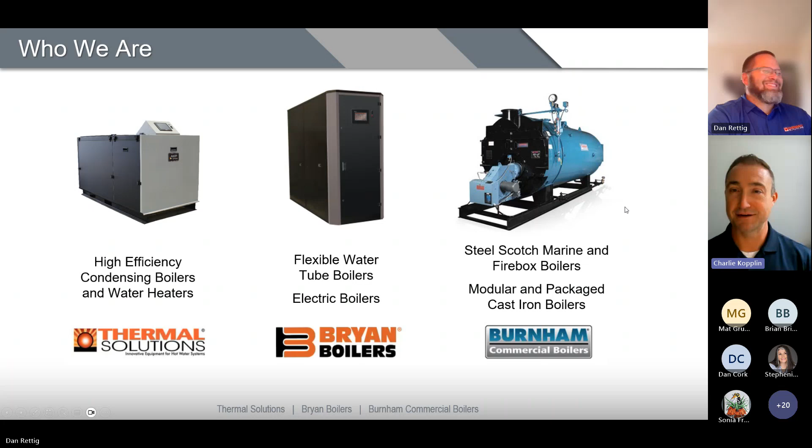Yeah, thank you, Charlie. I'd like to apologize to everybody before we get started. I traveled last week and brought a cold or a virus home with me. I was out getting voice of customer and brought more home than I wanted to. So I'm working to get over that, but I think we can get through the next hour together.

As Charlie said, this is the third webinar we've done in the series, so this one will be a little shorter than the previous two - we were right up to the hour on those. Today we'll be talking about hydronic piping, some questions that come around common manifold sizing, why manufacturers have the recommended sizes they do, some common problems with variable speed pumps and flow rates. We'll talk about that and different piping configurations.

Then we'll get into what's been a pretty hot topic in the industry for the last several years: water quality. As more and more high efficiency boilers have got accepted into the market and installed, what's popped its head out is that these units have small passageways and are more sensitive to poor water quality. So we need to make sure we're aware of what that water quality is in the systems we're putting it in, so we'll talk about that.

I've got a reference manual on the screen - I think this is a big takeaway. If you go back 10 years ago, if you looked into any boiler manufacturer's manual, there'd be minimal reference to water quality. Now you can pick up 10 manuals and you're going to see some kind of reference to water quality, different types of filtration, air separation. So the industry is going in the correct direction to provide good guidance for specifying engineers and installers.

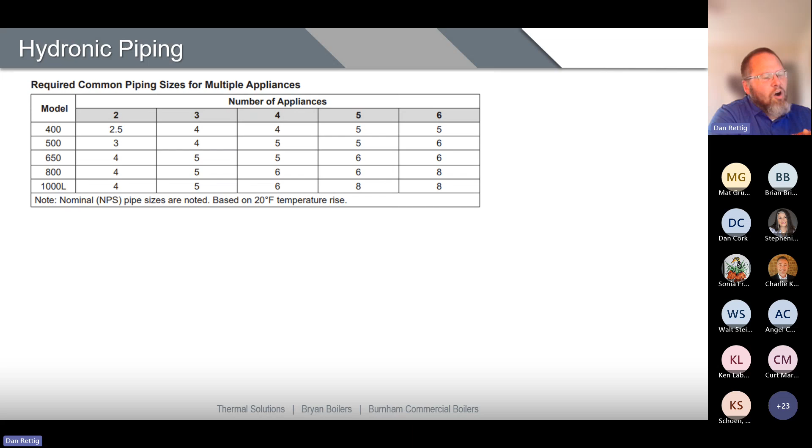But that is a pretty common conversation that'll be had on this common manifold piping. Why is it so large at times? And that is always going to be towards the maximum flow. And then also in this chart, you're going to see, just your basic, the one at the bottom right is going to be your recommended range for delta T's. You're going to have this provided by every boiler manufacturer, and that's going to allow you to properly size a pump.

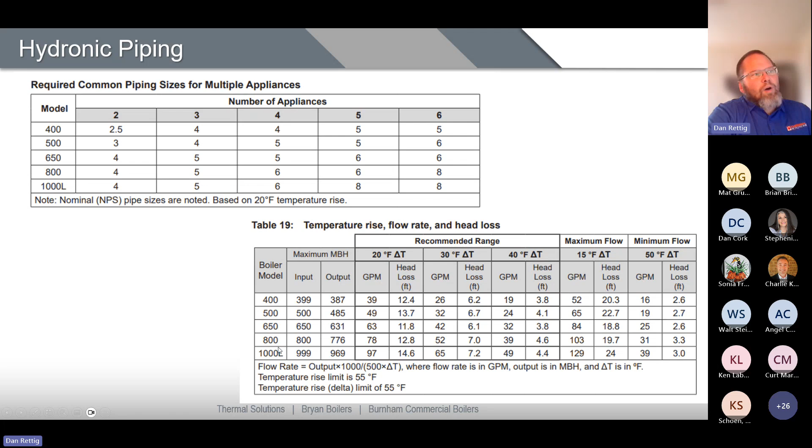A lot of manufacturers for boilers will offer some kind of pump. If you have a specific brand you want to use, you may not be able to source that brand from that manufacturer. You can always go through your local pump rep to get that specific brand, but most manufacturers will provide some kind of pump in their catalog, and they'll usually have a recommendation on what pump to use with what model.

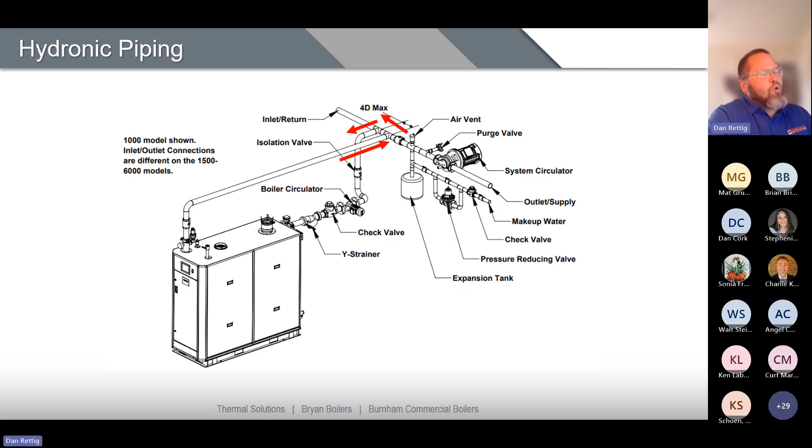What you'll do is you'll have to know the GPM range out in the system and the GPM of the boiler. But that is, if you're not willing to adjust the system circulator speed and you have this issue going on, you're going to have to put some kind of buffer of volume in between those. Or, you just turn down the system pump, or turn up the system pump so it's always flowing more than the boiler loop, pulling those BTUs away.

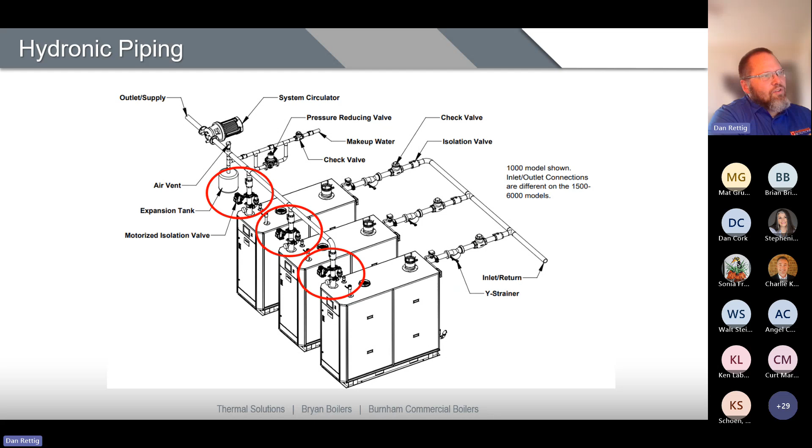Even if somebody's controlling the logic on a regular basis and doesn't have any issues, that doesn't mean that some kind of bug can pop up and one of these isolation valves may close on accident. So it's really just a dynamic of what happens in this situation in this piping arrangement, but this is something that I've seen over the years happen quite a bit.

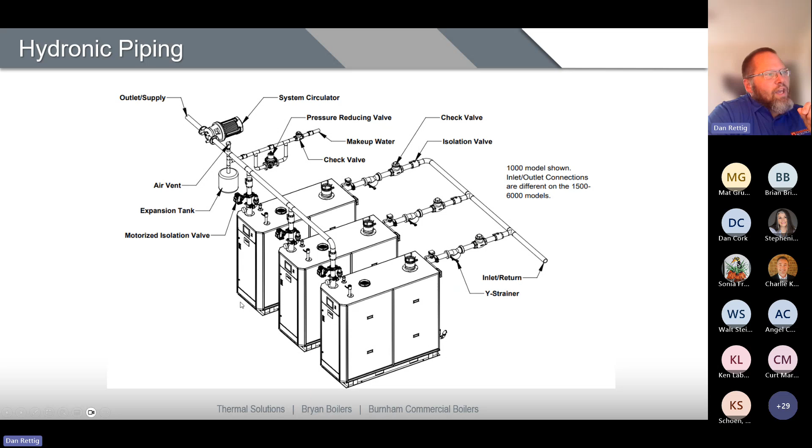Most systems, as you know, are going to have a minimum flow rate, so this can be just set at that minimum flow rate, and you can maintain that system flow if you want to isolate the boilers when they're not operating. In that previous scenario, a lot of people like to isolate the boiler because they don't want flow going through a non-firing boiler. But again, we just need to be aware if there's nowhere for the water to go, it's going to find somewhere to go, right? It's going to exit the system.

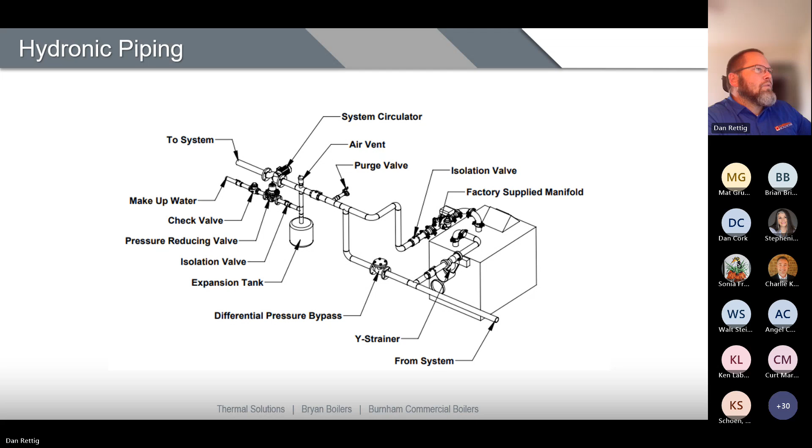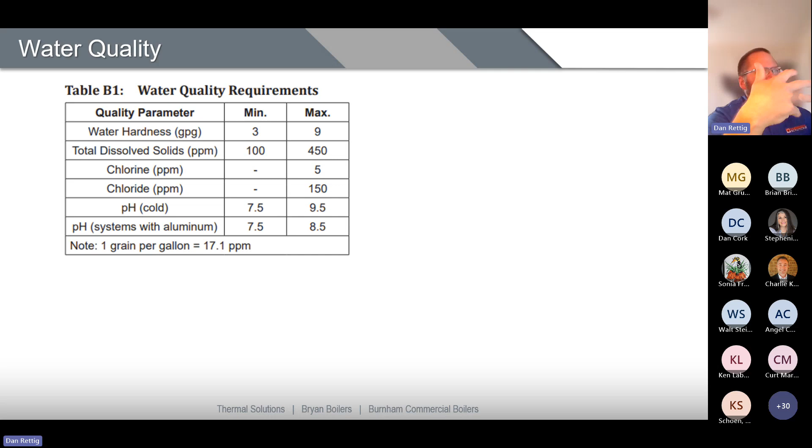So now we'll get into water quality. As I said at the beginning of the presentation, we have taken major steps in the industry towards water quality. I remember the conversations 10 years ago, it was like, well, what is the recommendations of the manufacturers? A lot of us were just kind of standoffish, we'd say go talk to the water quality experts. But we all realized we can no longer hold that line. So what you started to see is everybody was getting parameters put in their manuals, giving different recommendations. I would say we're still not all giving the same recommendations, but we do have recommendations. So again, we're in a lot better place than we were 10 years ago as an industry.

So right here, you'll see our water quality requirements as far as water hardness, total dissolved solids, chlorine, and pH. So referencing the total dissolved solids earlier, that's just all the nasty stuff that's in the water. You can see our maximum is 450 ppm.

So what I was talking about earlier with excessive flow, velocity and piping - if you aren't monitoring your TDS, that's what you can start to see is pitting in the 90s or anywhere the water hits the pipe and has to move. Even possibly in a T, you may see some pitting. But again, that's not unusual.

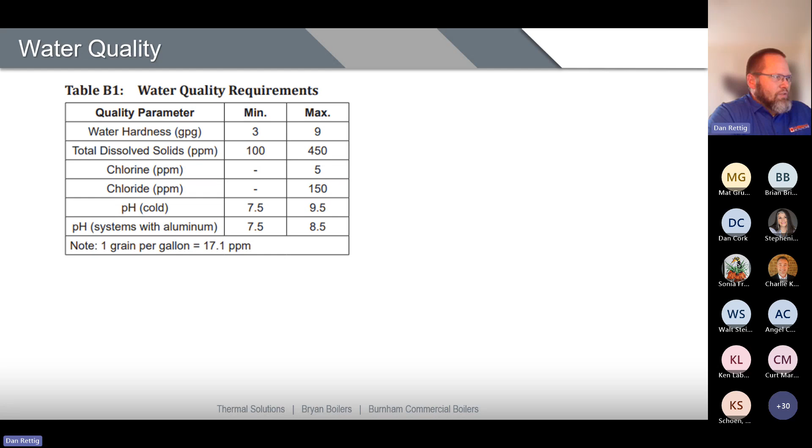But now with these guidelines, I think a lot more people are paying attention to their water quality, so we do give good recommendations. Now this is also something interesting - you're going to start to see reference to water meters. There's recommendations that say put a water meter in your system, that way if it's leaking, you can actually verify.

Through the years, I've been on many job sites. You go there and they're like, oh, my system's not leaking, or it's a small leak. So if the system is leaking, what happens is you're introducing fresh water into it. That fresh water, if it's not being treated, that system becomes more like an open loop water heater, domestic water heating system, than a closed loop hydronic system.

So to give an example, one job site didn't have a water meter. We were pretty sure the system was leaking. So we actually turned the incoming water off, came back the next day, and that system had been operating at 20 PSI. When we came back, the system was at 8. So it had lost a significant amount of water.

So then what we did is we got there to get it running, opened it back up, and the system filled itself back up. After that, they installed a water meter and did find out they had a pretty significant leak, and then they had to go locate the leaks. This was a system that had a lot of buried pipe under the ground, so it did take them some time to resolve those leaks.

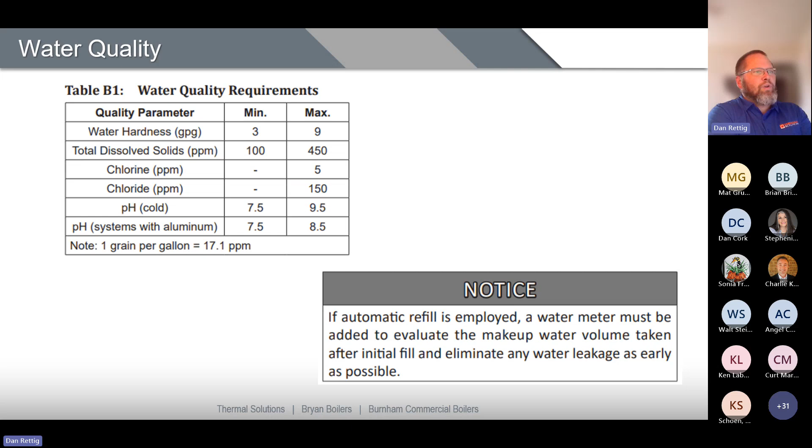So here is a reference to different inhibitors - scale, corrosion scale inhibitors. There's many manufacturers out there. You'll see Fernox here on the screen, Sentinel, ADEY.

What I would recommend is that you reach out to the local representatives of some of these inhibitors and have conversations with them when you design your system or go to fill your system, and find out what's going to be best for you. There are also local chemical manufacturers and representatives that will help.

They have different solutions - these are just the top 4 that are really focused on the boiler industry, and so most of the boiler manufacturers have good relationships with them. So you'll see them referenced throughout their manuals.

And then also just off to the right is the glycol solution. I believe everybody knows this, but just in case - the more glycol solution you have, that adds extra pressure drop in the system, so you've got to size your pumps accordingly. You'll see at 50% glycol, you're going to need to increase your flow by 24% to get the same heat transfer. If not, the system won't perform as you thought it would.

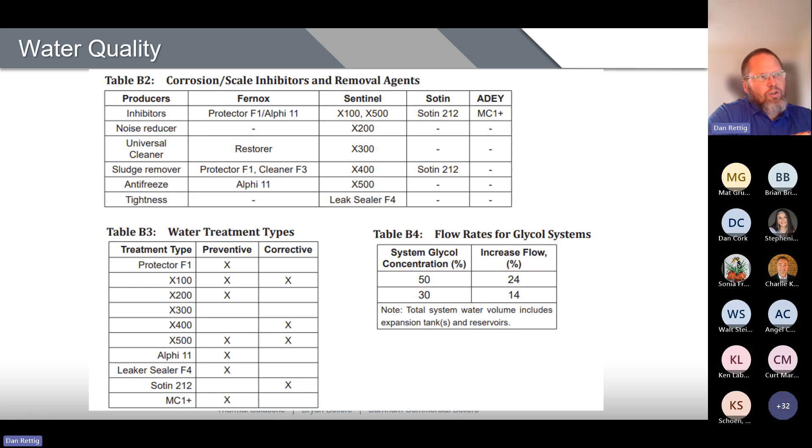So just something to be aware of, and that's a general rule of thumb. Each glycol will have a different derate associated with it, but that is a good rule of thumb there.

Let's get into some other accessories. Obviously, we don't manufacture these accessories, but I think it's good to have conversations about them.

So if you look at some other things we can do for water quality, look at magnetic filters. If anybody hasn't gone to YouTube or Googled magnetic filters, I'd recommend doing that after this webinar, just to see some of the junk that's in these systems. You've got people online that put these magnetic filters in, and they won't even run the system for a day.

They'll go to lunch, they'll put it in, they'll come back and pull out these magnetic rods, and they're just covered in junk. So where does that junk end up, especially if it's magnetite or something? It's going to end up on your variable speed ECM pumps, it's going to end up in your boiler. It's going to find somewhere to live, it's not just going to float around the system. So we want to get rid of that. I'd highly recommend, if you aren't familiar with magnetic filters, get online and look at them, especially in any kind of retrofit system.

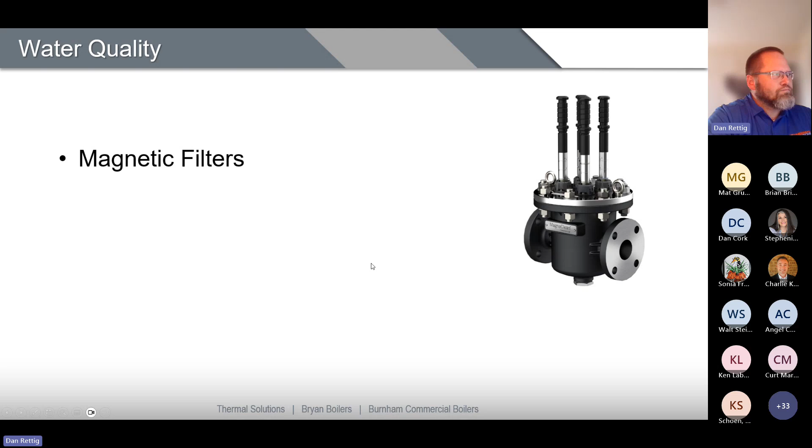I highly recommend some kind of magnetic filter. And then air eliminators, right? I think one of the major issues with hydronic systems is air elimination. We probably don't talk enough about it, but we want to make sure we're getting rid of all the air in the system. There are different manufacturers with different devices, but we want to make sure we get rid of that air, because that air will actually degrade the glycol.

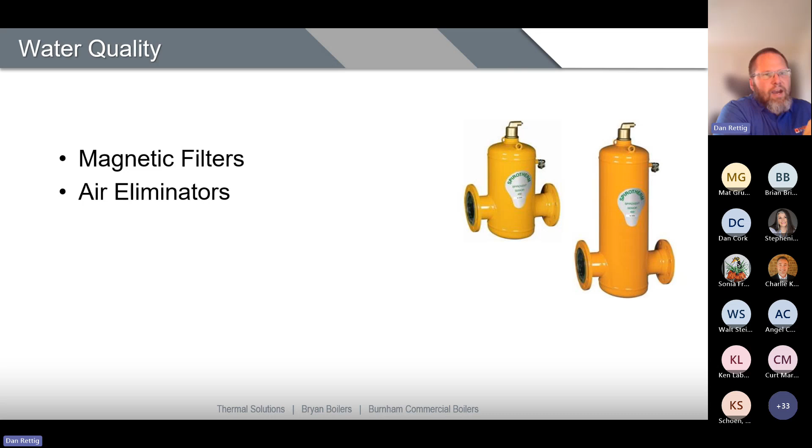So if we went ahead and spent money putting glycol in there for protection, if we don't get rid of the air, that air is going to eat away at the glycol, and then your investment in the glycol is useless because you're going to have to replace it. Also, the air in the system will start to eat away at and cause corrosion of any kind of metallic pipe over time. So again, we want to remove as much air and continue to remove air. That's another thing - if you have a system with a leak and you're introducing fresh water, you're also introducing air with that every time you introduce fresh water into that system.

This is something I was unaware of until about five years ago, so I think we all learn every day in this industry. But I recommend that you fill the system with demineralized water. No clue - I remember we started off doing this 25 years ago. We would install a boiler, just crank the water up from the system and let it go. Worst thing we could have been doing for the boiler system, right?

So now a lot of manufacturers have these demineralizers where you hook up the fresh water, it'll filter that water and then introduce it into the system. So now you're putting in clean water, giving yourself the best chance for success at the beginning. We've treated the water, we've done all we could, so we demineralize it, we'll put glycol and some other inhibitors in there, and then we'll also look at these magnetic filters and air eliminators. That's going to give us the best possibility for longevity and a high efficiency system.

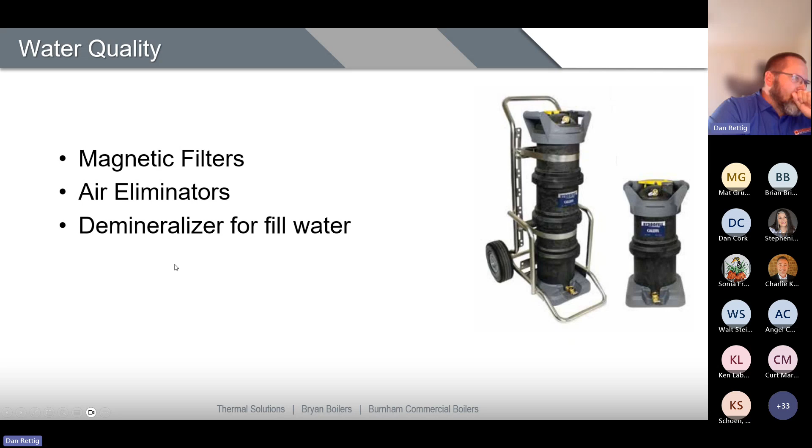So manufacturers are not shipping boilers with magnetite and scale in them - it happens because of the system dynamics and either leaks in the system or poor water quality. So this will happen to anybody's product, it's just a matter of time if you have bad water quality. But it is more common - you're going to see these with high efficiency boilers because of the passageways. They're smaller, so the potential for them to get backed up with all this scale and magnetite increases dramatically.

That's why the system ran previously for 30 years with a cast iron unit - well, those passageways are bigger, so you didn't see these kind of issues. But now this is a common issue with high efficiency boilers if we ignore the water quality.

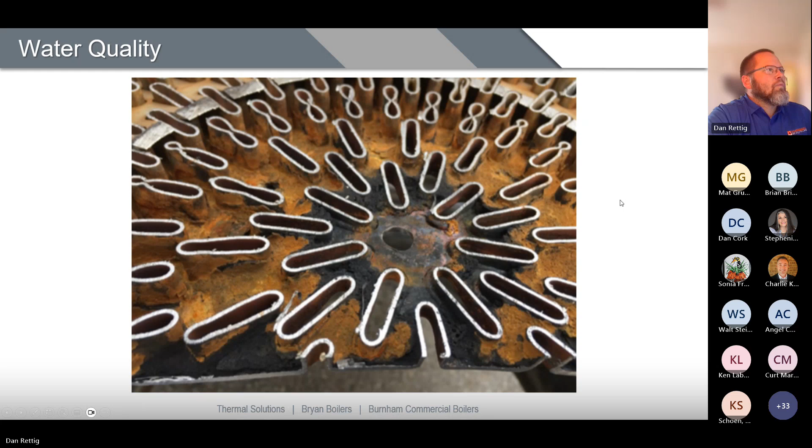A lot of people like this piping arrangement because they don't have to heat up the system. So if I'm doing this, I heat that boiler up to 180, and then I pull that 180 directly into the indirect tank. I transfer those BTUs into the tank. It goes right back to the boiler inlet, and all that heat stays right there.

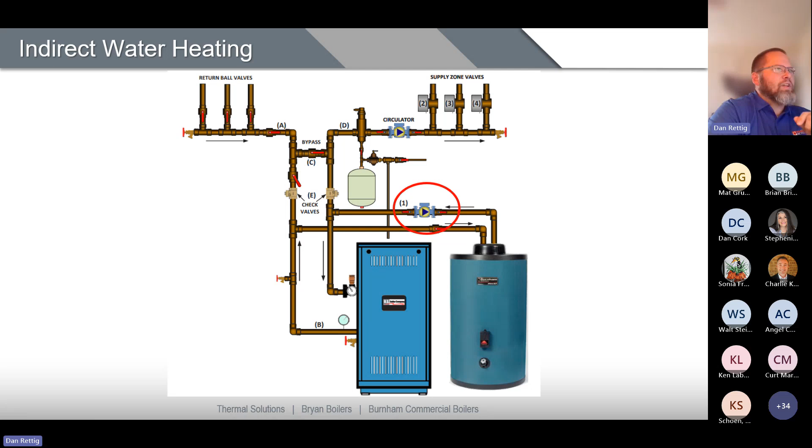Now, one advantage to this is that this pump here only has to be sized to overcome the pressure drop inside the indirect tank. We no longer have to worry about the pressure drop in the boiler also.

One downside to this configuration is now I've got to heat this loop up to 180. So if the boiler's firing at 180, it's going to get up here. If sized correctly, I'm going to pull all those BTUs into the indirect tank. But if it's not sized correctly, I could have some heat migrate out into the system, and you may not want that heat out there. It just really depends on the system design and how everything's sized.

So there are advantages and disadvantages to each system. But either way you go, what you want to make sure is that the indirect tank is sized to pull away the BTUs.

So if you have too much boiler horsepower—let's say a 300,000 BTU boiler and the indirect tank can only hold 150,000 BTUs of energy—a couple things are going to happen. That tank, you continue to run, and you're going to have possible issues with the boiler if it's not able to reduce its capacity.

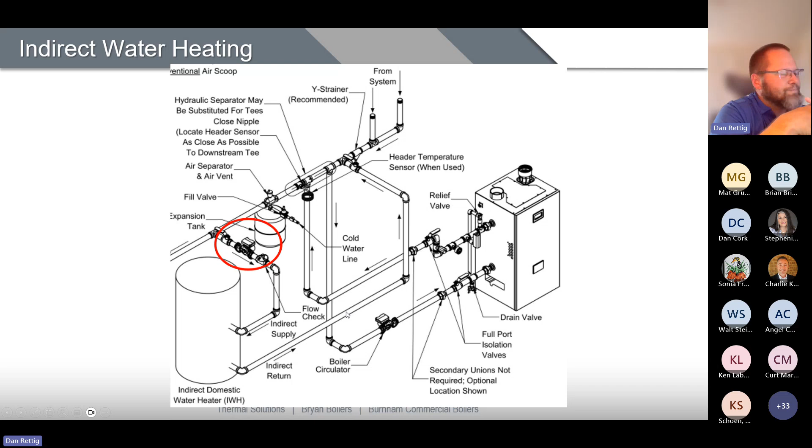So that's typically going to be the largest you're going to see in an indirect tank, 119 gallons. And then it'll go down to probably 80, that 50 range, maybe down to 30 or 20 gallons on an indirect tank.

The hot water generator is going to be a very similar setup, but it does leave you some customization. So now you can customize the size of your tank depending on your load and your recovery rate, and also you can change that tube bundle.

In the indirect tank we have on the screen here, that tube is fixed. With the tube bundle, the manufacturer can just replace that, and that can have different performance. So you can work with the manufacturers of these hot water generators and actually size one to your system. That's what's nice about a hot water generator, you're going to get larger volume and some customization.

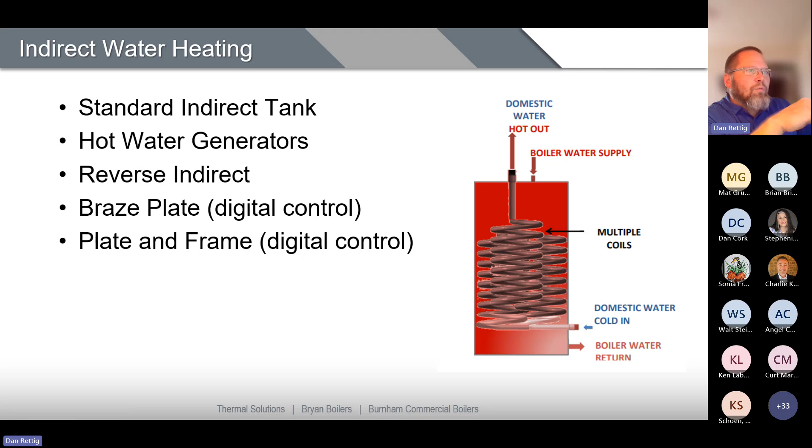And then we have this in the industry, a reverse indirect. Previously we were providing the boiler water through the coil. Here the boiler water goes into the pressure vessel, so that pressure vessel becomes a buffer tank and your heat source for the domestic hot water. The domestic cold water comes in, goes through these tubes and then out. This is what the industry refers to as a reverse indirect, more of an instantaneous style where you're not really storing the domestic hot water, you're storing the boiler water here.

And this is going to have similar sizing recommendations. You provide the pressure vessel with 180 degree stored water, and you'll get X performance out of the coils.

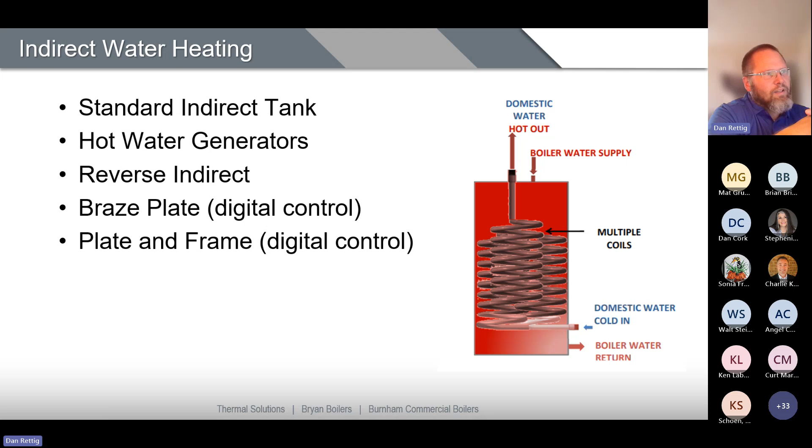And then what's become a little more common, a little more desired the last 5 to 6 years, is using a braze plate or a plate and frame. You'll see these as just a basic plate and frame, a braze plate, and you'll also see them with a digital control, which will add cost to that platform.

But the biggest downside to these is, right, these are instantaneous, but this is the boiler side of the system. So if you don't have at all times 180 or 160 degrees here, once you get that domestic flow, what are you going to be doing? You're going to be delivering cold water to the occupants, or whatever your application is, and you need that domestic hot water. So these work fine as long as you design into your system that you have a constant flow of 160, 180, whatever you need to transfer to that domestic hot water.

So that's been the biggest downside to these, people are like, oh, well, they're instantaneous. They are, but if you're not prepared to have the BTUs on the boiler side ready to deliver, it's not instantaneous, because once the domestic flow starts, if you're waiting for that boiler to go through pre-purge, you're probably 45 seconds to a minute, then the boiler's got to fire, then it's got to ramp up temperature. So you could be 2 to 2.5 minutes until 180 degrees gets to that braze plate or plate and frame to start transferring the energy. These systems work well, but you've got to make sure you take into consideration you have the BTUs there to transfer.

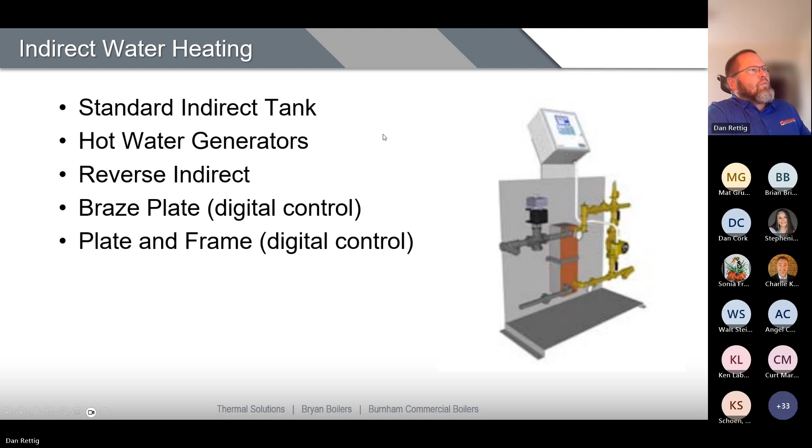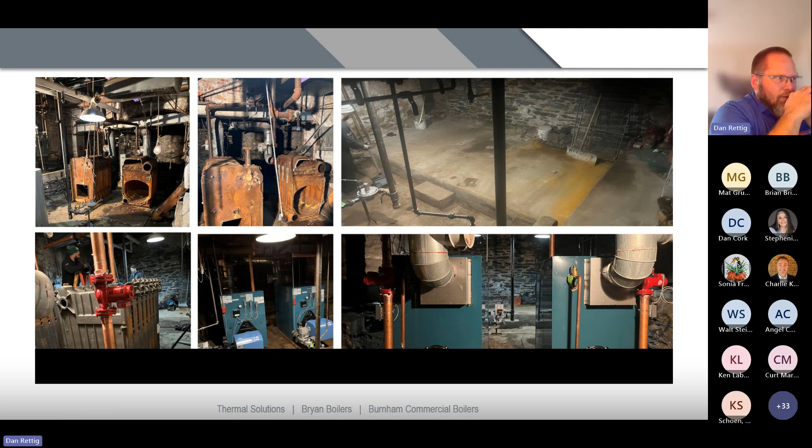And I've shown this the previous 2 webinars, again we've been talking about cast to condensing, and that's great, but every job may not lend itself to going that way. There's nothing wrong with just going straight back with what your system currently has. If it's a cast system and you want to go back with cast boilers, that's completely all right.

So kind of close up here with what condensing products do we provide. Charlie kind of talked about the 3 brands, so I'll talk about what we have underneath the thermal solutions line. We have the Apex boiler, that's going to give you 5 models from an input of 399 to 800.

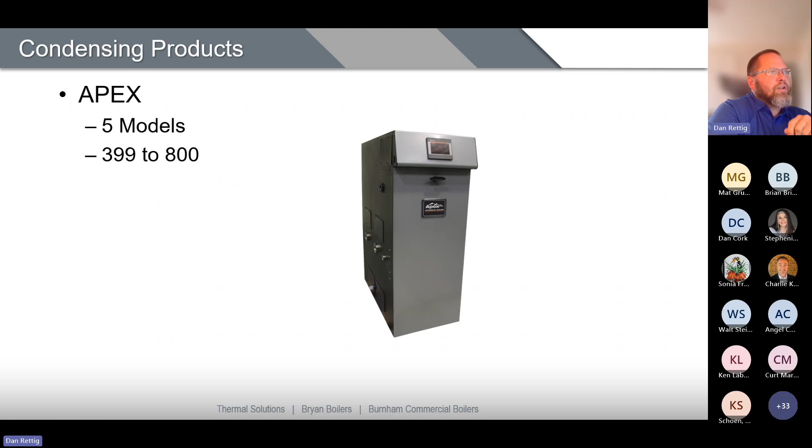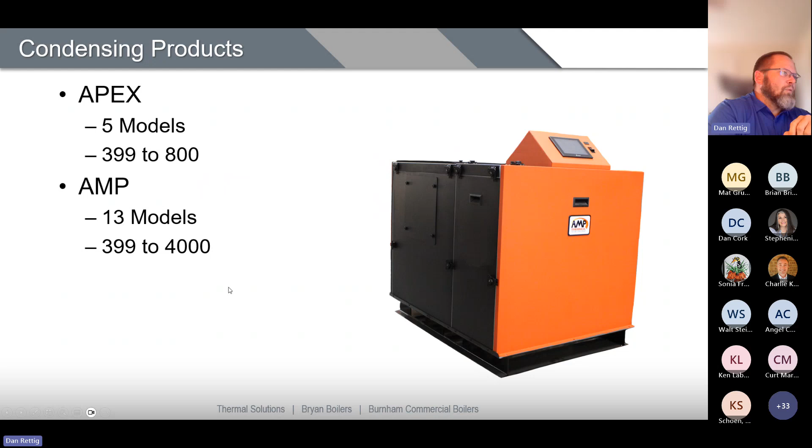We've got the Amp, that's going to be a total of 13 models, the 399 on the input up to 4 million. And then we have our Arctic, which is a total of 11 models, the 999, the million BTU, all the way up to 6 million.

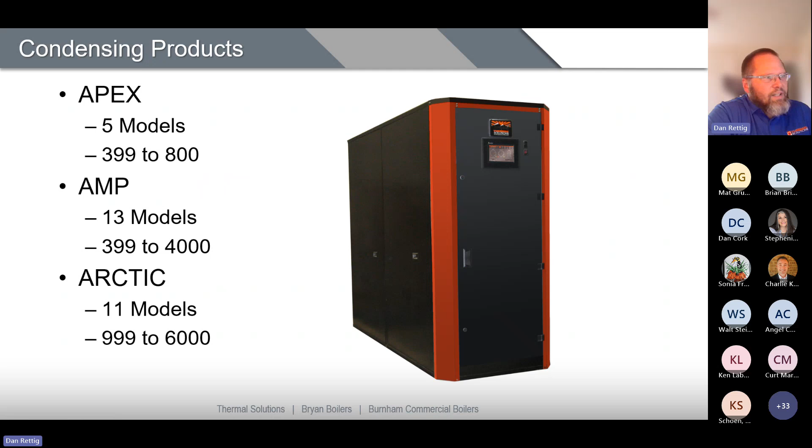So if you're looking for a condensing product and you want to investigate our thermal solutions line, I just ask that you reach out to your local manufacturer's representatives and they can get you the information you need. But we'd like to be of assistance to you in any way we can.

So kind of in summary here, I'm about to lose my voice. We're probably all glad this is about to get over with.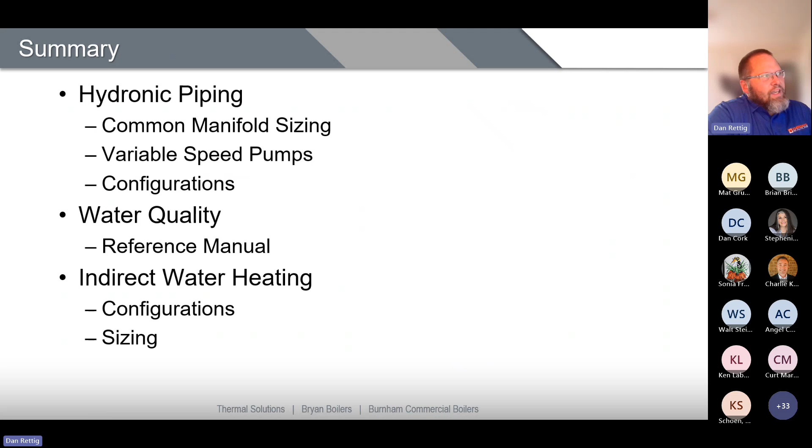We talked about the hydronic piping, just again, the common manifold sizing. Just need to make sure to check your flow rates. What is it going to be, your flow rates? If you're going to go maximum flow, make sure you size it accordingly. Do not try to get price sensitive and go with the small size pipe and then have too much velocity going through that pipe.

Variable speed pumps are great, energy efficient, and they can really maximize the system. But we do need to be aware of how that system and the boiler circulators perform together, because they can create issues if we're not aware of how they work together. There's different ways to pipe these boiler systems. Any way works good, but they can all have issues if we aren't aware of what issues to look for.

Water quality, I can't state enough that I believe we're going in a good direction as an industry, trying to give better guidance to water quality. I'm sure we can do better, but again, we're in a lot better place now than we were 10 years ago. And then indirect water heating, right?

I think that's overlooked a lot in the industry. People want to do a separate domestic hot water system. Most of our boiler systems do have a little bit extra capacity, a little bit of redundancy. So it's probably not going to hurt from the heating capacity if we use a little bit of those BTUs to heat the domestic hot water indirectly. We just want to make sure that we size those correctly and we're using the right configuration for our demand.

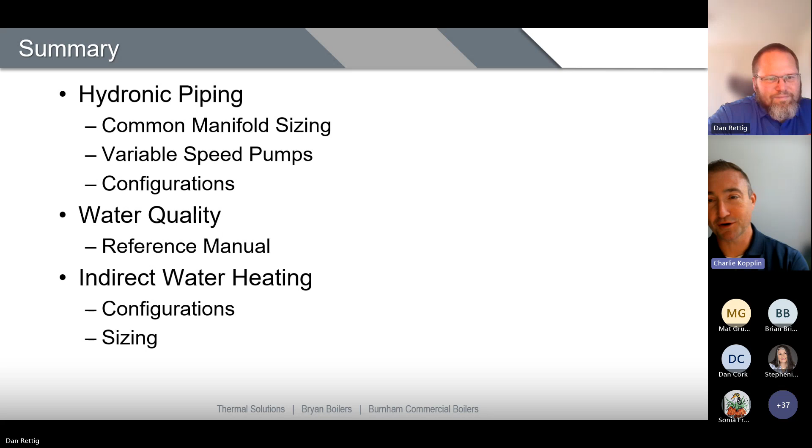All right, there are a couple more questions here coming in too, some a little bit more specific on the actual water quality. Aaron had mentioned a question here. You mentioned the 450 parts per million on the TDS, wondering if you had any numbers on hardness and a couple others. But let's just start there with hardness. What do you got there?

Yeah, so again, I'm gonna make some assumptions here. I think they're in the manual. I didn't pull those exactly, but you should be able to get to those. And if not, we can get back to Aaron on what those would be, or actually we can get back to the group. But all that should be in the manual. I just kind of took one section out of the manual, so that was not every water quality parameter available.

And they would cover also pH and chlorine. He mentioned those as well. Yeah, reading his question quick. I think he was referencing here. I'm kind of reading too, assuming above and below. I'd have to look at the exact parameters. So yeah, those are good questions.

And again, I think we're doing better. We probably may still have some voids that we need to fill, but we can reference the manual and get back to those. I don't have this off the top of my head, I don't know the specific numbers. Gotcha. All right, we can certainly share those.

All right, last question here: Apex versus AMP, kind of the same size range. When do you use one over the other?

Okay, well that's a good question. So I think if I'm just looking at the products, the Apex product has 5-to-1 turn down. The AMP has 10-to-1. So if I'm looking at would this turn down matter for the system, that could be when I look at the system requirements. Does higher turn down allow me to not short cycle as much?